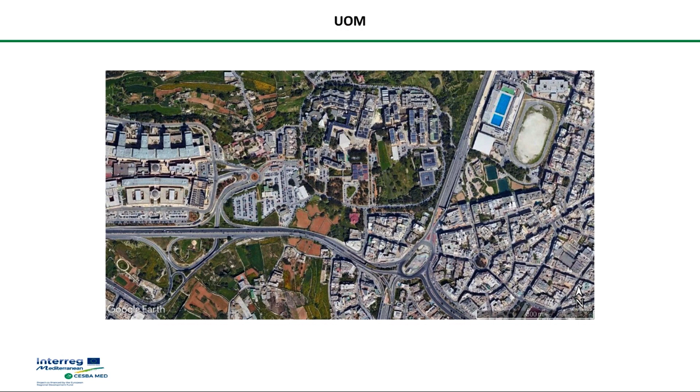The first part of the study was a data analysis. The University of Malta is situated in Msida, which is a central part of Malta, and it is surrounded by a number of main roads, as one can see.

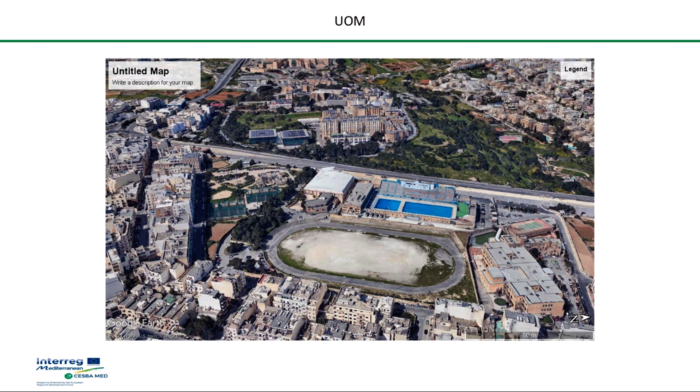So this is a view of the campus, another part of the campus.

So the data required, which is entered in the SBTool urban scale, consists of the areas, gross and site footprint, together with the transport facilities, the economic structure and values. So this concerns costs, employment and land values, energy usage, so electrical energy, thermal energy, primary energy demand, renewables, and also energy recycling.

Atmospheric emissions, greenhouse gases, non-renewable resources, water, solid waste, liquid waste, environmental aspects such as the discharge of groundwater, light pollution, air quality, noise, wind, green zones, ecological diversity, as well as social aspects, considering aspects such as safety and accessibility, traffic and mobility, communication services, public and private facilities, local food, management and community involvement, society, culture and heritage.

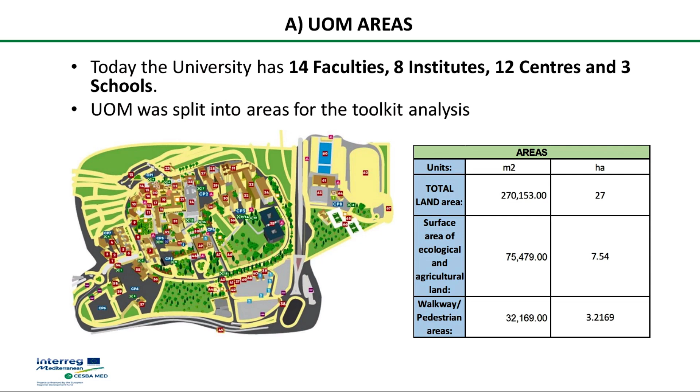So here we can see a site plan of the University of Malta with the different faculties, institutes and centers, and we can see the different types of land usage.

So the University of Malta buildings areas consists of a number of buildings, including the ICT building, which will be considered as a building scale later on, and then medicine and surgery, chemistry, IT services, engineering, Dar Giuzeppi Zahra, Maths and Physics, SLT. So these are the different faculties or buildings that constitute the University of Malta, of which the built-up area would be 26919 meters squared.

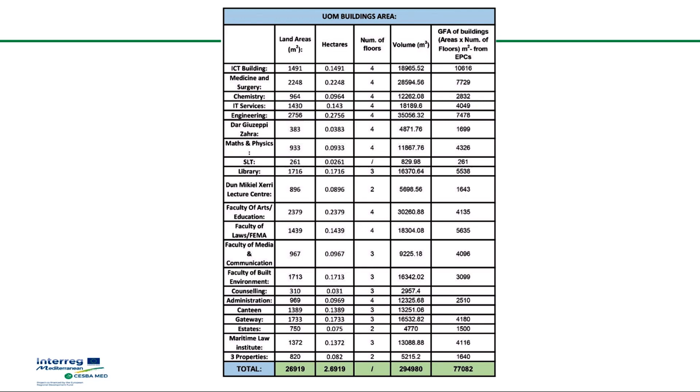In each building we have considered the number of floors, the volume for each building, as well as the gross floor area, the total gross floor area of each building. So the total gross floor area is computed as the area of that building times the number of floors. This data is taken from EPC certificates.

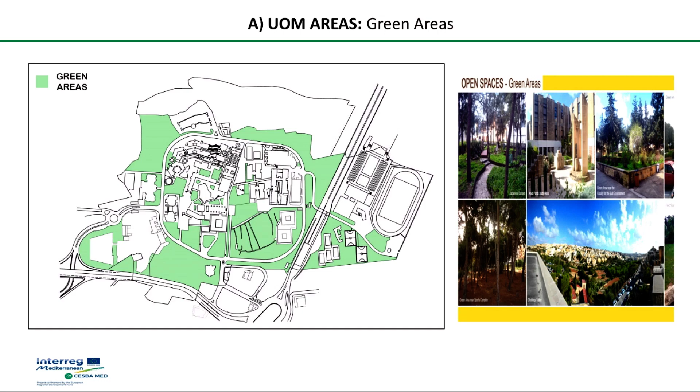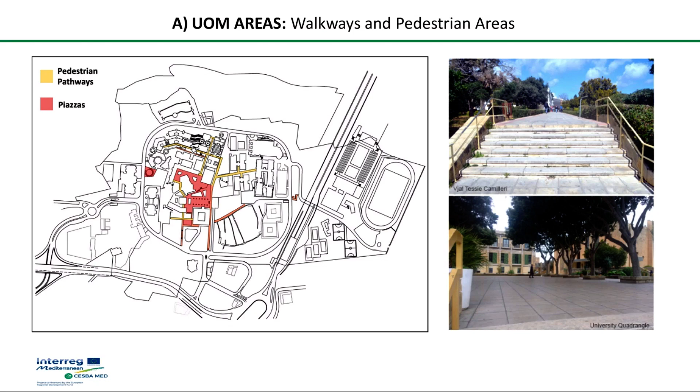We have then considered also the green areas in the university, which are represented by the shaded green areas here, and the walkways and pedestrian areas, which consist of pedestrian pathways, as well as piazzas. And they are represented again in this site plan over this slide.

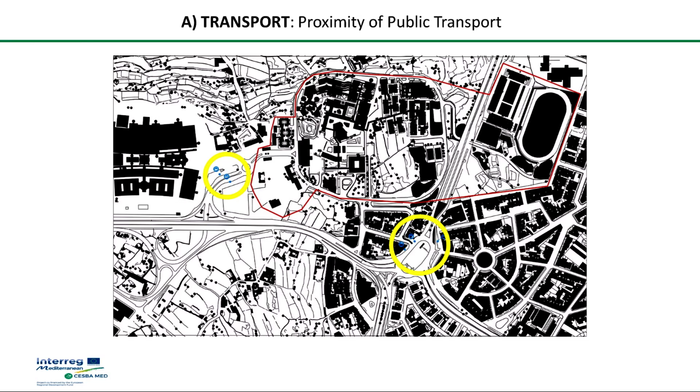Proximity of transport. So we have two main sites where there are bus stops, and a circle was drawn to consider the coverage of that transport mechanism, and in order to evaluate how much of the university area these transport sites covered.

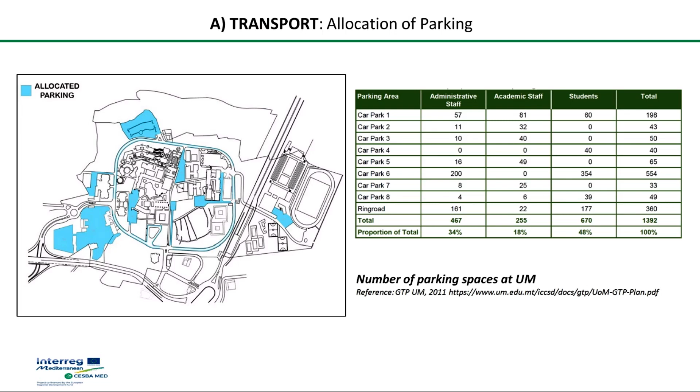As one can see, this total area has to cater for the administrative staff, the academic staff, students, which in total is 198 persons.

The value of land, taken from the National Statistics Office property price index, shows that on average land value has increased by 5% each year, and in recent years this has gone even higher. This indicator assesses the increase in the cost of land relative to the increase in cost of living, assessed over a 5-year period.

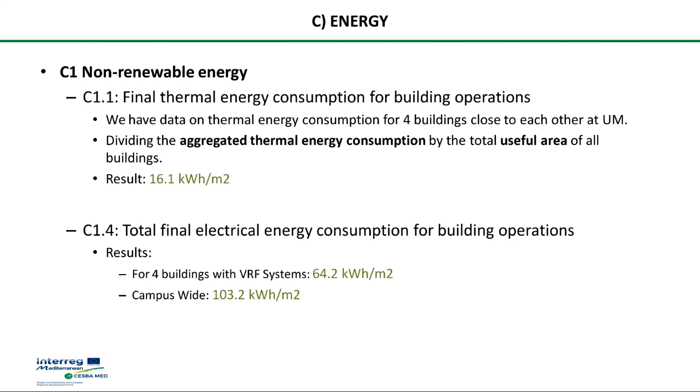University-wide, this value goes up to 103.2 kilowatt hours per meter squared. The lower value for the 4 buildings is where the VRF systems are installed.

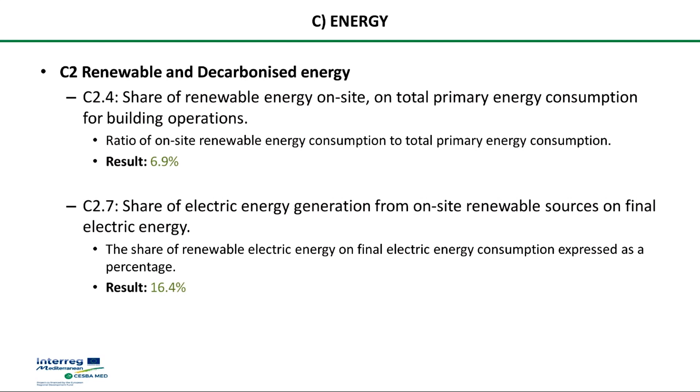Renewable and decarbonized energy: we consider the share of on-site renewable energy on total primary energy consumption for building operations. We compute the ratio of on-site renewable energy consumption to total primary energy consumption, which in this case is 6.9%. We also compute the share of electrical energy generation from on-site renewable resources, mainly PV panels, on final energy consumption. This share, expressed as a percentage, is 16.4%.

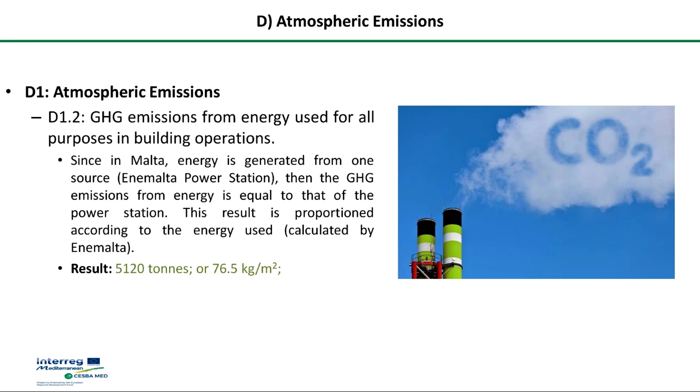Atmospheric emissions: greenhouse gas emissions from energy used for all purposes of building operations. In Malta there is just one power station, the Enemalta power station, so GHG emissions equal that of the power station, proportioned according to energy used. The result is 5,120 tons, which in terms of kilograms per meter squared results in 76.5 kilograms per meter squared of greenhouse gases.

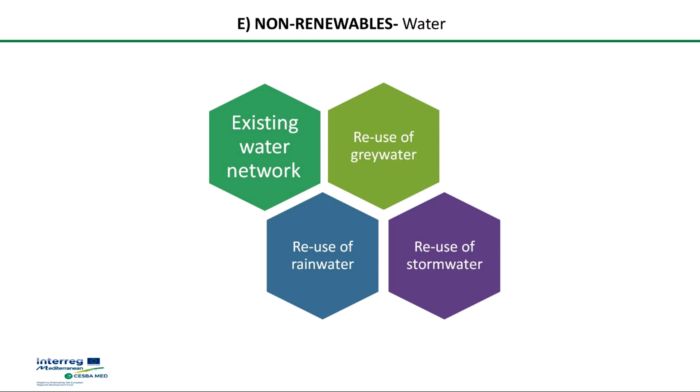Non-renewables, water usage: here we consider the existing water network, the reuse of grey water, reuse of rainwater, and reuse of stormwater.

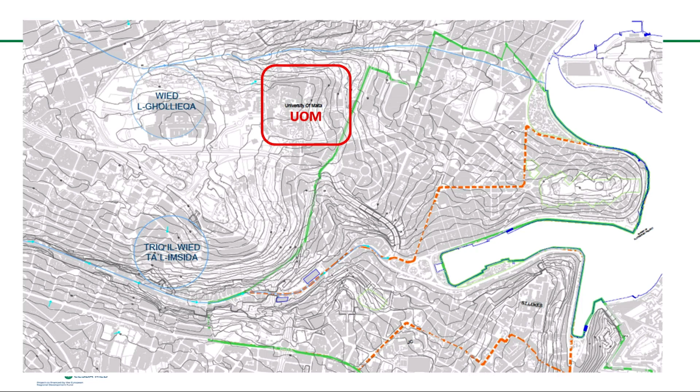Here we have the positioning of the University of Malta, surrounded by two valleys. This is a plan of the University showing the networks: the main supply network, water supply from the water tank, water supply to the water tank, rainwater, and the positions of the gate valves on the main supply.

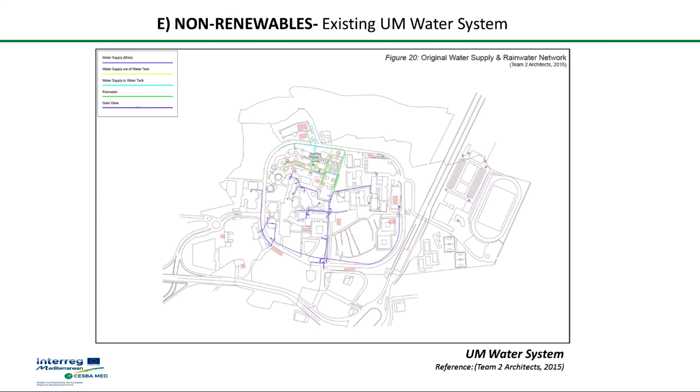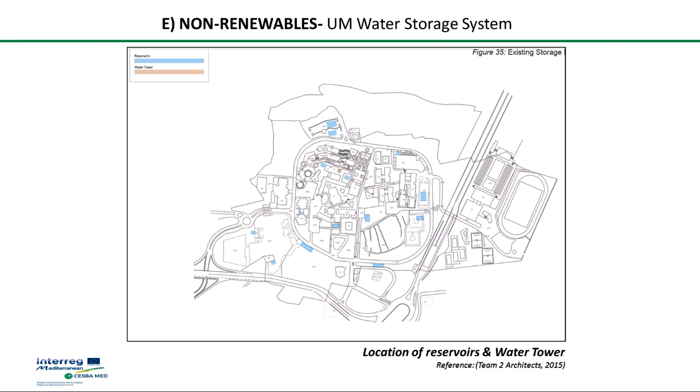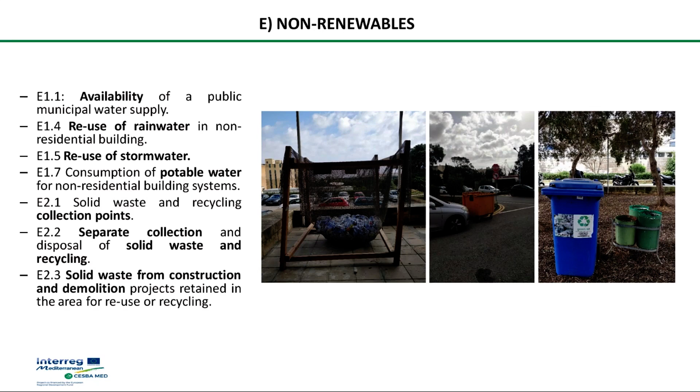As part of renewables and non-renewables, we also consider the availability of public municipal water supply, reuse of rainwater in non-residential buildings, reuse of stormwater, consumption of potable water for non-residential building systems, solid waste and recycling collection points, separate collection and disposal of solid waste and recycling, and solid waste from construction and demolition projects retained in the area for reuse or recycling.

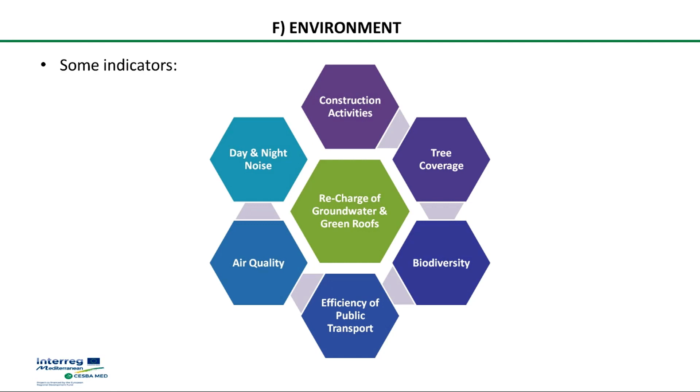As regards the environment, we have a number of indicators to consider: construction activities, day and night noise, recharge of groundwater and green roofs, tree coverage, air quality, efficiency of public transport, and biodiversity.

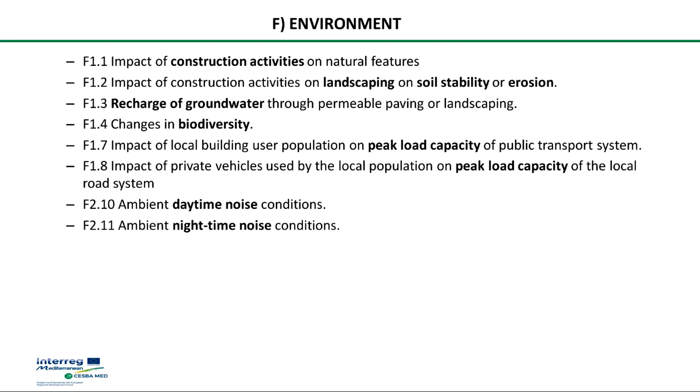So we will consider the impact of construction activities on natural features, landscaping, soil stability and erosion, recharge of groundwater through permeable paving and/or landscaping, changes in biodiversity, impact of local building user population on peak load capacity of the public transport system, impact of private vehicles on peak load capacity of the local road system, ambient daytime and nighttime noise conditions.

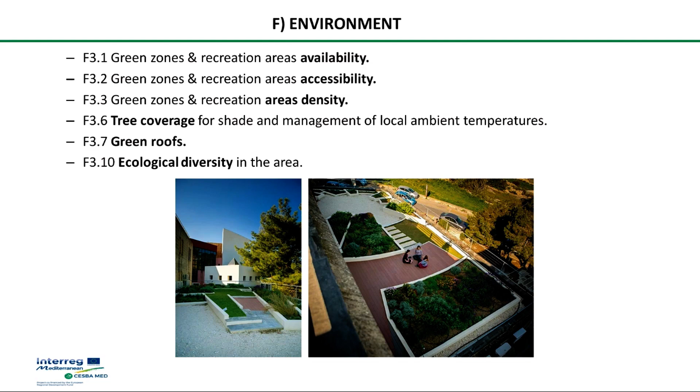In this case we have the green zones and recreation areas availability, accessibility to the same areas, the density of these areas, tree coverage for shade and management of local ambient temperatures, green roofs, and ecological diversity in the area.

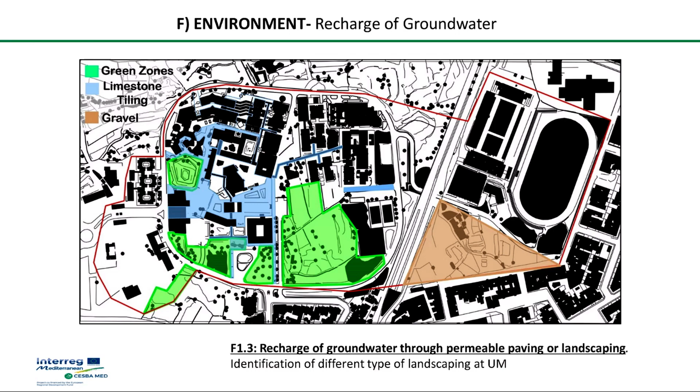Here we can consider the recharge mechanisms for the groundwater. In this case one has to consider the different surface conditions such as green zones, limestone tiling and gravel.

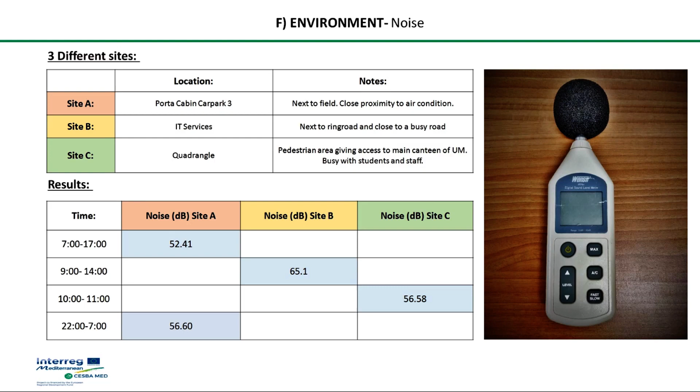We took different measurements at different times for the three sites, and these measurements are represented in the table below at different time intervals.

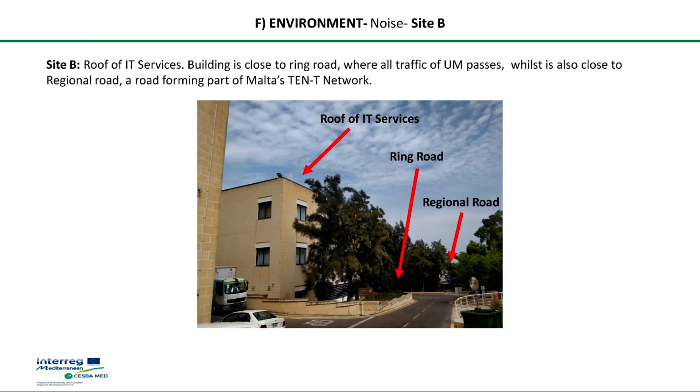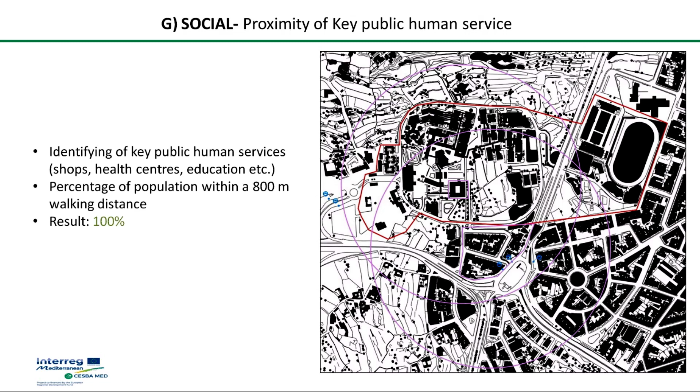In this case we considered the proximity of key public human services. These include shops, health centers, and education centers, and this parameter is calculated by estimating the percentage of the population within 800 meters walking distance from these facilities. In this particular case, it was found that 100% of the population is within this 800 meters walking distance from these services.

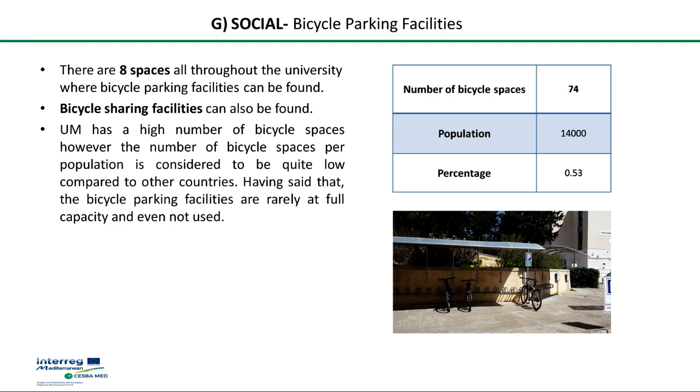Result: bicycle parking facilities - there are 74 parking spaces, the population is 14,000, so this is a percentage of 0.53%.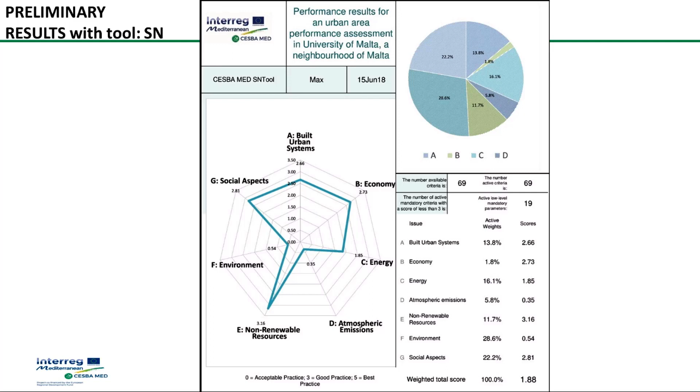So we will now consider the building tool, which is the ICT building, University of Malta, at the University of Malta.

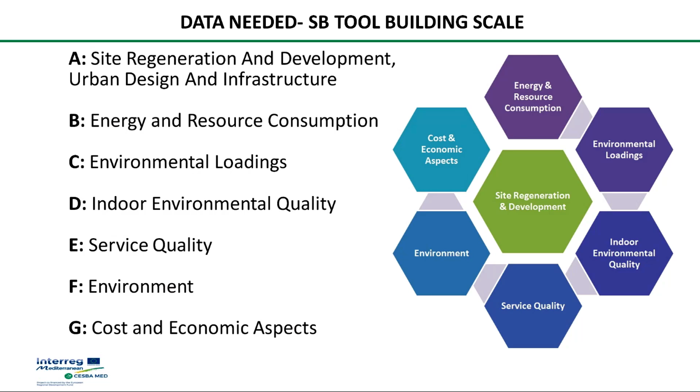In this case we use the SB tool, building scale tool. So we have to consider site regeneration and development, energy and resource consumption, environmental loadings, indoor environmental quality, service quality, environment, cost and economic aspects.

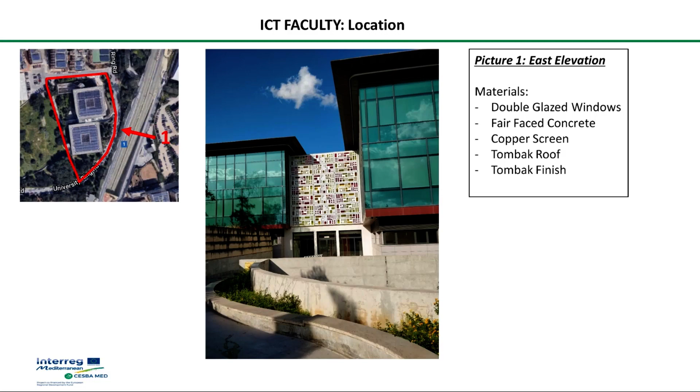So the building is relatively new, and in fact it consists of double glazed windows, fair faced concrete, copper screen, Tombak roof, as well as a Tombak finish.

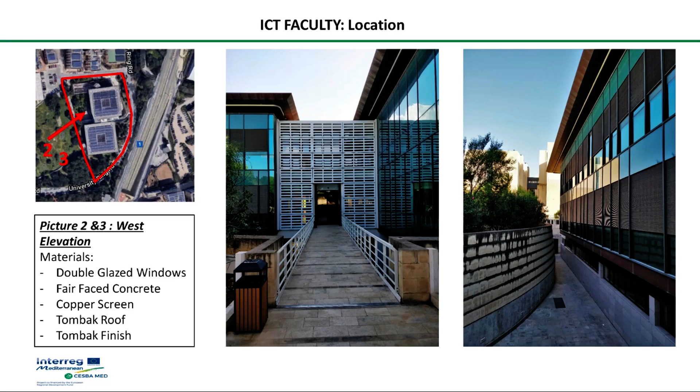Here are other photos of the building being considered, where we can see the usage of the different materials.

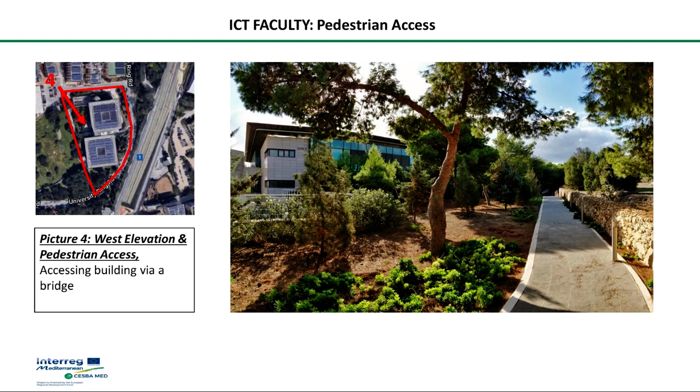And here we can see the access via the pedestrian pathway and the elevation from the west side.

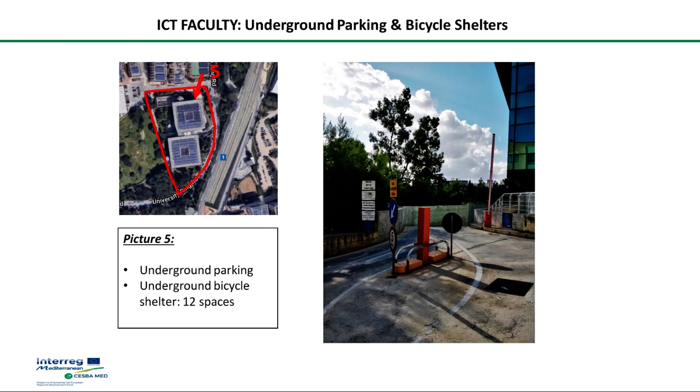So the ICT faculty has an underground parking facility as well, with some bicycle shelters in the same parking lot.

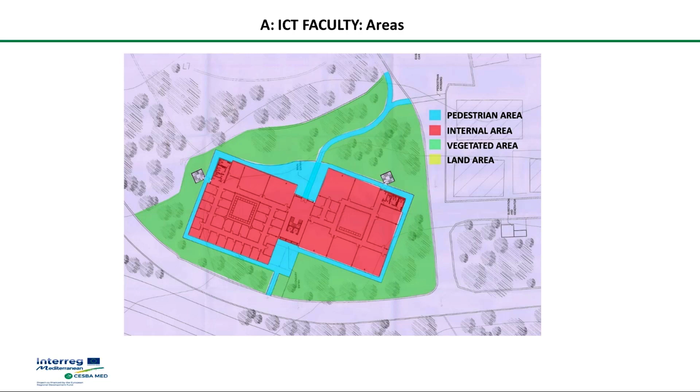These are the areas of the ICT faculty. We can see the pedestrian area, the actual internal area, the vegetation area, as well as the total land area. In this case we can see that the internal area of one floor is 3000 meters squared, total land area is 8800 meters squared, vegetation area is 4600 meters squared, and the non-vegetation area is 963 meters squared.

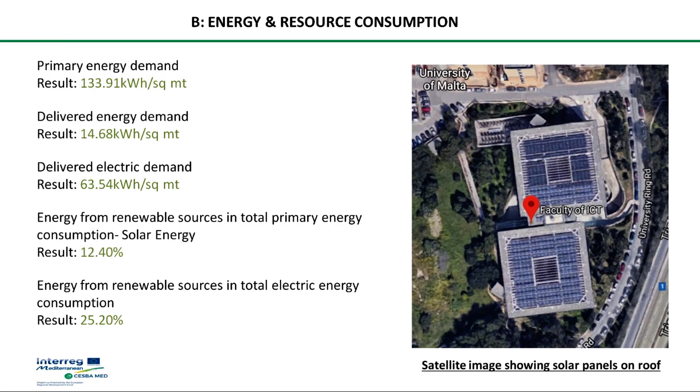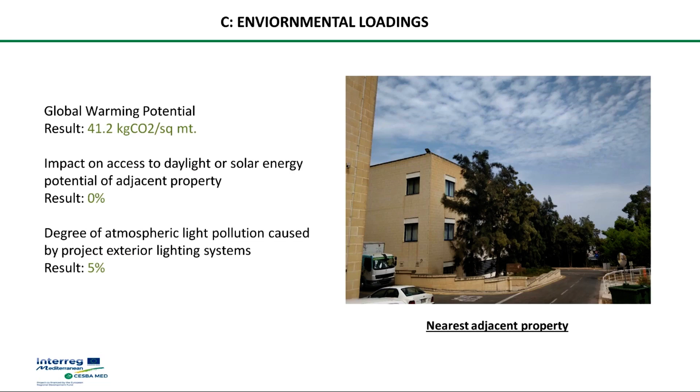Environmental loadings. The global warming potential was computed as 41 kilogram of carbon dioxide per square meter. The impact on access to daylight or solar energy potential of adjacent property is 0%, because the university height is low compared to others and doesn't impact the light access of other adjacent buildings. The degree of atmospheric light pollution caused by project exterior lighting systems is also low, just 5%.

Total volatile organic compound concentration was measured using sensors fixed at walls. Indoors this was 1470 parts per million, while outside VOCs was measured to be 3300 parts per million. Again, looking at carbon dioxide, indoor is 447 parts per million, while outdoor is 476 parts per million.

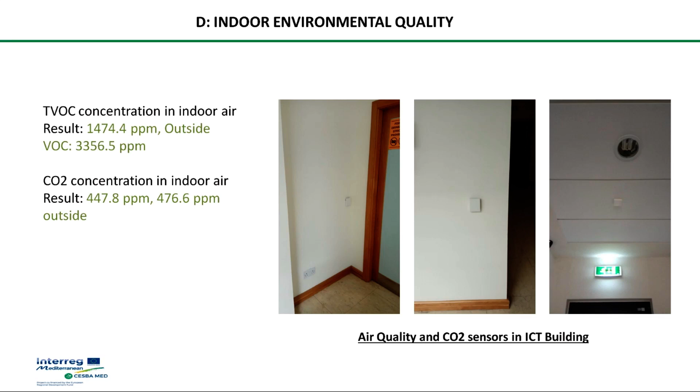The high level of TVOC on the outside is probably because the faculty is situated very near the main road, where there is a high level of traffic density.

A survey was carried out for the users of the building, scaled using Likert scaling. We considered thermal comfort, safety in case of fire and smoke, whether there was any case of flooding, safety during normal operation, satisfaction with the control of lighting, and satisfaction with the control of heating and ventilation.

We can see that since this is a closed building, ventilation satisfaction is not that good.

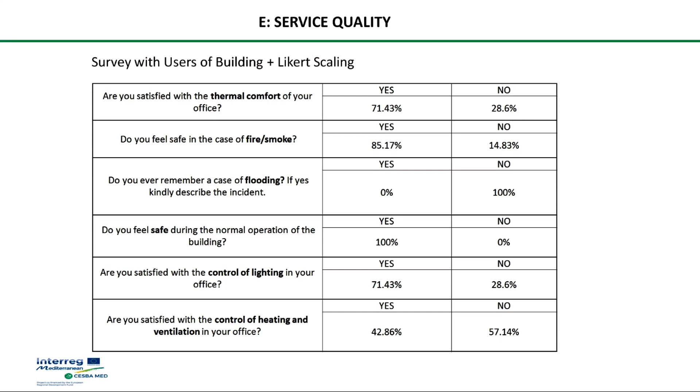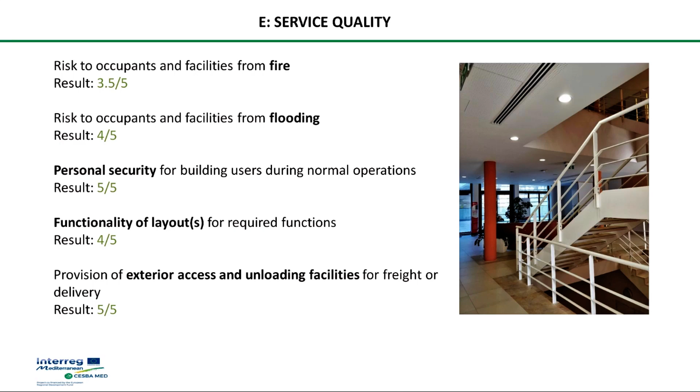Service quality: risk to occupants and facilities from fire gets a result of 3.5 out of 5. Flooding is high, so 4 out of 5. Personal security is good, 5 out of 5. Functionality of layout is good, 4 out of 5. External access and unloading facilities are also good, 5 out of 5.

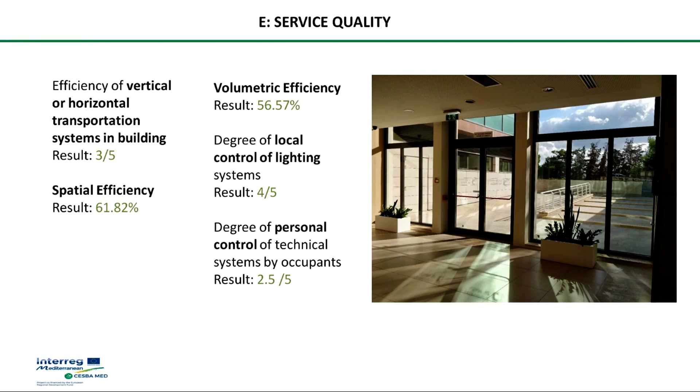Spatial efficiency: 61%. Volumetric efficiency: 56.57%. Degree of local control of lighting: 4 out of 5. Degree of personal control of technical systems by occupants: 2.5 out of 5.

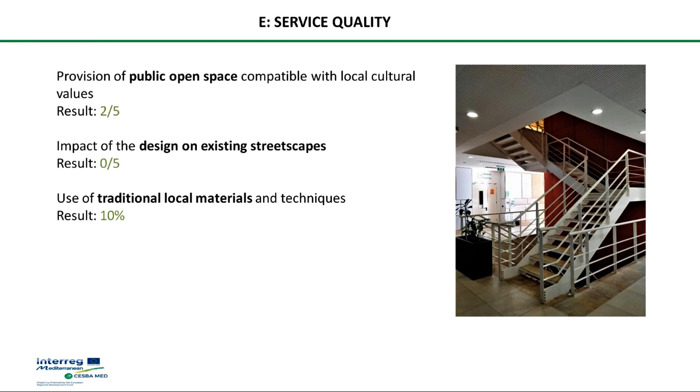Provision of public open space compatible with local cultural values is 2 out of 5. Impact of the design on existing streetscapes has very little impact, so that is 0 out of 5. Use of traditional local materials and techniques is very low because, as I said, it's a quite modern building and uses modern materials, so it's just 10%.

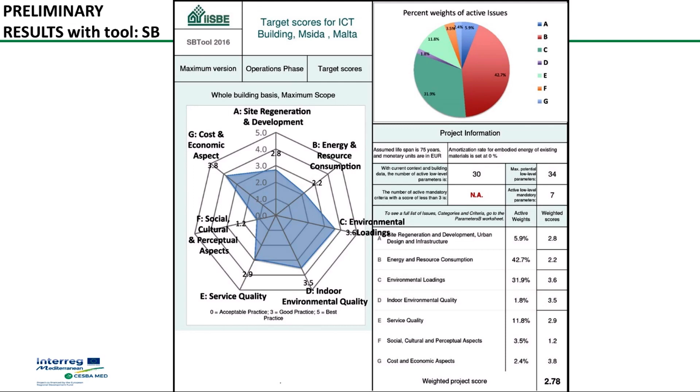So these are the results input in the SB tool with this course. Again, we have considered site regeneration, development, urban design and infrastructure, energy and resource consumption, environmental loadings, indoor environmental quality, service quality, social, culture and perceptual aspects, cost and economic aspects. We have given active weightings for these as shown in this table, and the projected total score when we do this weighting is 2.78, which is just below the good practice threshold.

How does this tool work? First, decide whether the indicator is relevant or not, since some indicators will not be relevant for the local context. Then read the assessment method and work out the ratio or percentage.

Then there are two tools, the GFU tool and the SN tool. The GFU tool will set benchmarks that are linked, so you work on one sheet and open the other. In the SN tool, we open it and insert the worked out ratio percentage, and the program gives weightings to each and every indicator.

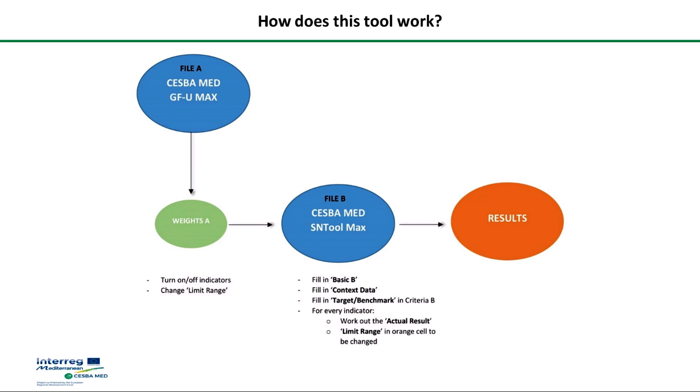So we have file A, which is the GFU max values. These give the weights which are input to the SN tool max, where we have the context data, the target and benchmark in criteria B, and for every indicator we have the actual result and the limit range, and then we compute the results.